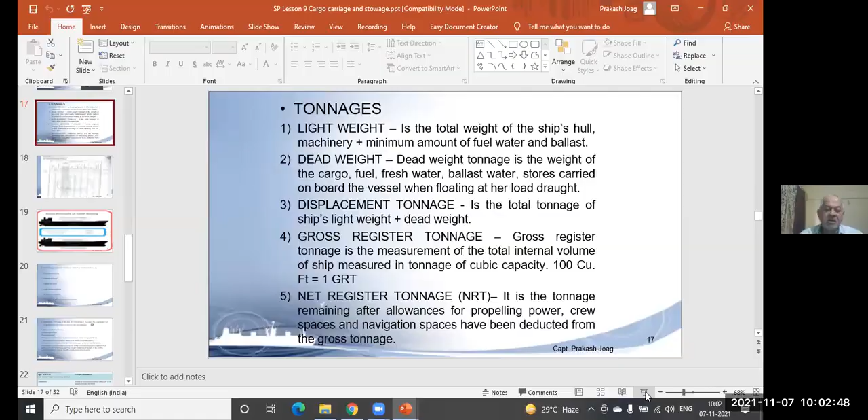So last time where we have left, let us do a little recap on that and we will proceed. Last time we had seen tonnages, and I explained tonnage with a simple example of a scooter or a car taken from a showroom.

When a scooter is in the showroom and you weigh it on a weighing scale, whatever weight you get is the lightweight, and it is called lightweight for a ship also. Whenever a ship is built and ready for delivery...

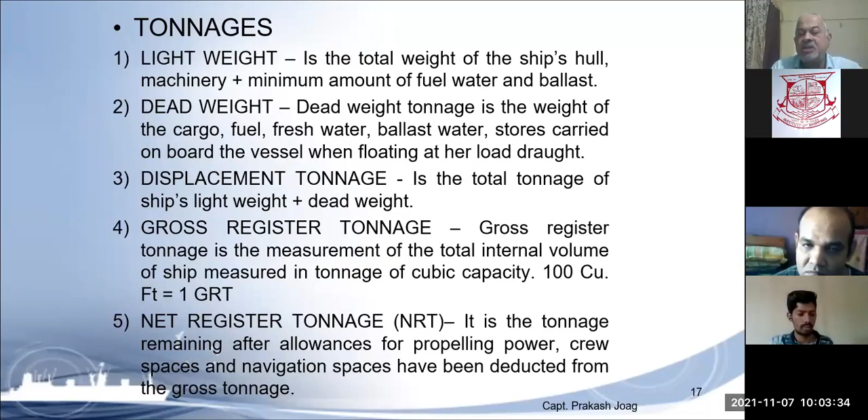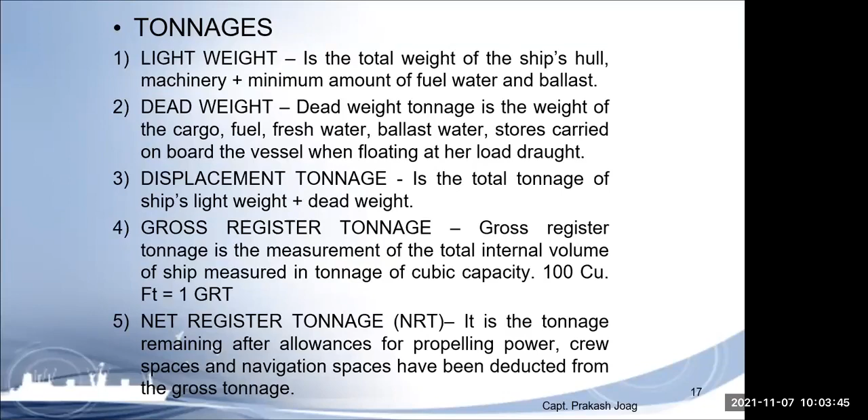The total weights are calculated as per how much material is used for making or building this ship, and that is the lightweight of the ship, with a little amount of fuel and a little amount of ballast, just sufficient for running the engine and keeping the ship afloat. So that is the lightweight of the ship.

This lightweight is a weight measurement, and the unit is tons. 1 ton is 1000 kg, 1000 kg is 1 ton.

Then we come to dead weight. The main component of dead weight tonnage is cargo. Then you will have fuel, fresh water, ballast water, stores, all those things added to the running ship, which are accounted in dead weight. But dead weight will not be having lightweight with it.

No lightweight, only added weights. Like we have seen in case of scooter - empty scooter weight is your lightweight. You sit on top, you have a pillion rider, you keep something in dicky, you keep your helmet hanging - all those things will be called dead weight. And you make a tank full, your petrol tank is full, then you add your lubricant, or you attach side mirrors or some extra things on the scooter - all those things will be your dead weight.

And for the ship, it is no extra shosha thing. So on ship, it is cargo, fuel, fresh water, ballast water, and stores that are carried on board. That weight which is added on the ship is called dead weight. And the main component of dead weight is cargo.

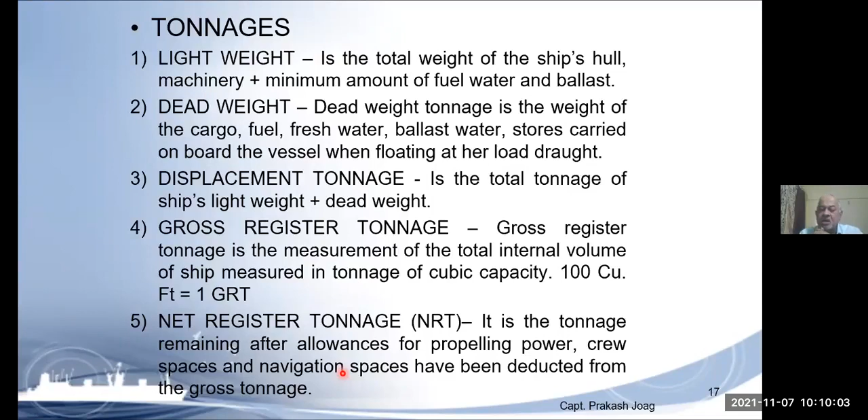Okay, so now why we are worried about this measurements, why we should know. As I mentioned, draft you were already knowing from our last lecture. Then I mentioned TPC, tons per centimeter. So how many tons for each ship, there will be a tons per centimeter.

So how many tons you have to add to have the ship sinking or coming up from the water by 1 centimeter? It may be 30 tons, it may be 60 tons, depending on the size of the ship, how big or how small it is. So when your draft is increasing as you add weight, you can easily calculate the total weight of the ship by draft. And this is given on a deadweight scale.

This is given by the builder. I have just scanned this and put it for you. This ship's name is SCI Pawan, Cochin Shipyard Limited, yard number so and so, and this is the deadweight scale. So on this side, if you see, this is the draft.

So draft of the ship, here draft you can read, and here you can see the deadweight, in salt water. How much deadweight will be there? This ship is very small. Here it is, I can read about 2000 tons deadweight.

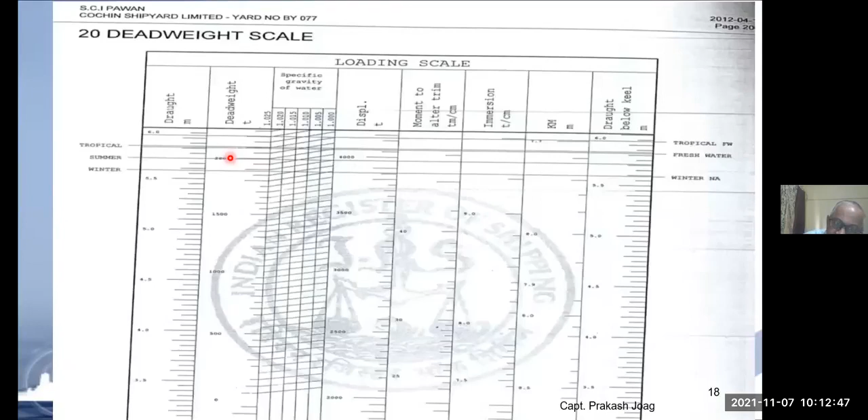So can you calculate the light weight of the ship? Displacement, suppose we take as 4,000, and deadweight is 2,000. What is the light weight of the ship? So 2,000 is your light weight of the ship.

And deadweight is having cargo, ballast, plus stores, and bunkers. So all those things come into your deadweight.

Now suppose you know the draft of the ship. If you can read the draft, you can easily calculate how much cargo is loaded or how much cargo is discharged. And for bulk carriers, the cargo is calculated by draft, because bulk carriers you cannot measure cargo when it is loaded in bulk, and you cannot weigh it as you load. You are not going to load 100 kg, 100 kg, 100 kg, not like that. It is continuously loaded in bulk, and then by a draft survey, the exact amount of cargo is calculated.

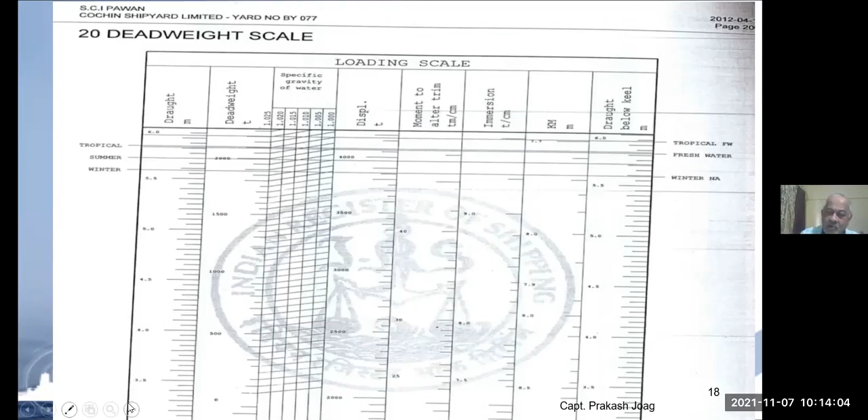Okay, so this is just an example given in your study material. First, when you come into port and take draft, you know the displacement. Then after loading cargo, you know the displacement again, so you can calculate the change in displacement, if you have not added any fresh water, bunkers, or lube oil.

Suppose within a short time you have loaded cargo, and while loading cargo you have to deballast, meaning take out the salt water kept for stability purposes. So the only change that has taken place is you have deballasted. Here they are saying change in displacement is 30,000, and change in ballast means you have taken out 5,500 from the ship. So total cargo loaded is this much, 35,500. Okay, so like that you can do these examples.

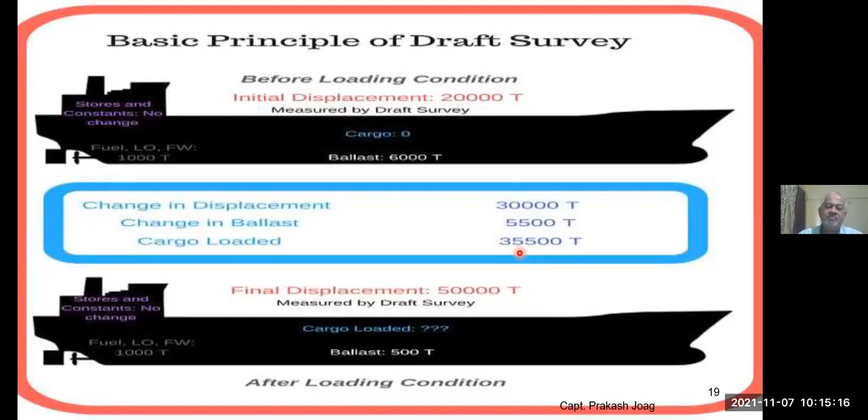Okay, so let us see further. When you are doing these cargo calculations, whether by draft or by taking sounding or ullage, there are so many people who should be there for calculation of cargo, how much cargo is loaded on the ship.

So one person is the charterer's surveyor. Whoever is chartering the ship, the charterer will appoint one surveyor. Surveyor means a person who is expert on this, so he will be doing these calculations. Number two, owner's surveyor, owner meaning ship owner. Charterer is who is taking the ship on rent, he is the charterer. Owner is the owner of the ship. I have told you, in our current shipping environment, whenever the word owner is used in shipping, it refers to the ship owner. So owner's surveyor, then appointed agent.

So suppose somebody has appointed, meaning owner or charterer has appointed an agent, then his person may be there. Then chief officer or master, sometimes master if chief officer is not there on ship. Otherwise chief officer, because chief officer is in charge of all the cargo operations on board the ship. And a chief officer, before becoming captain or master, he was chief officer, so he is expert on all these topics.

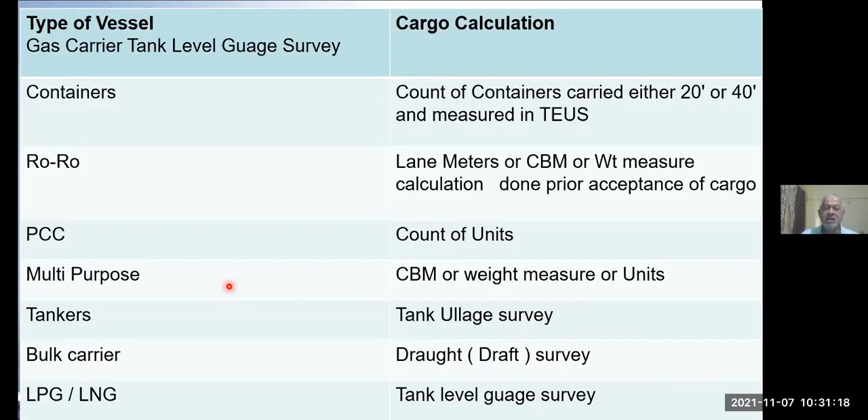Can you please explain the ullage survey section once again? Take a water bottle with a capacity of one liter, and suppose the bottle is half full - we say the bottle is half empty, correct? So for half empty, you measure from above down to the liquid surface height. That is called the height ullage of the tank.

Suppose the bottle height is one foot, and the half-full bottle has an empty space of half a foot above. Then you know the bottle is half full. Even if I don't show you the bottle, and I say half a foot is the empty space on top, you know the bottle has half a liter of water.

So the same way it is calculated, of course in tens of thousands of tons - maybe 10,000, 20,000, 5,000, 50,000 - because tanks are huge.

What is the difference between PCC and Ro-Ro vessels? Are these the same vessels? No - PCC is pure car carrier, meaning it doesn't take any cargo other than cars. But a Ro-Ro vessel can take any cargo, including automobiles - any cargo it can take, including cars.

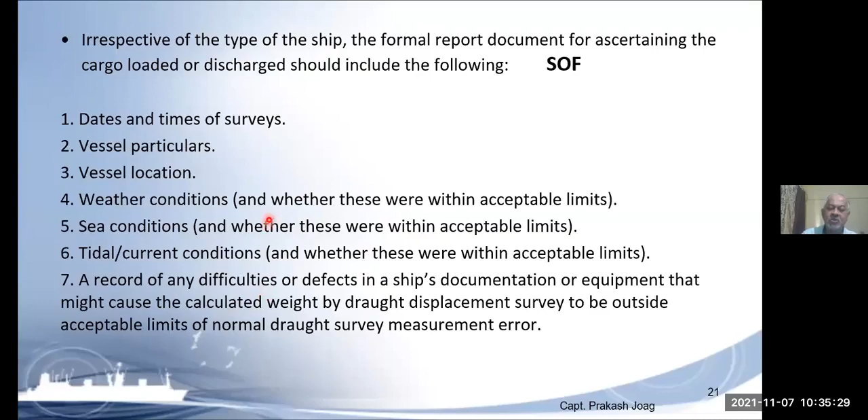So all these things are required to be recorded along with the time sheet. And this will be done by whom? We have seen this in the previous slide, about who all people will be there for these surveys.

Charterer's surveyor, owner's surveyor, appointed agent surveyor, chief officer, then shipper or consignee's representative or terminal representative - so many people will be involved. All people will calculate separately their own findings, and they will have to come to a common understanding, and they will declare the cargo figure, how much cargo is loaded on the ship.

Now let us see further - as we are doing the stowage of cargo on ship, the word stowage means keeping cargo on board the ship.

Different types of cargo require different things. Like liquid cargo requires a tank, and it has to be an airtight tank so that cargo does not evaporate and vapors do not come out. For car carriers, depending on whatever length of car is there - 1.5 meter, 2 meter car - those many slots will have to be there so that cars can be loaded easily. Such facilities are provided on ship.

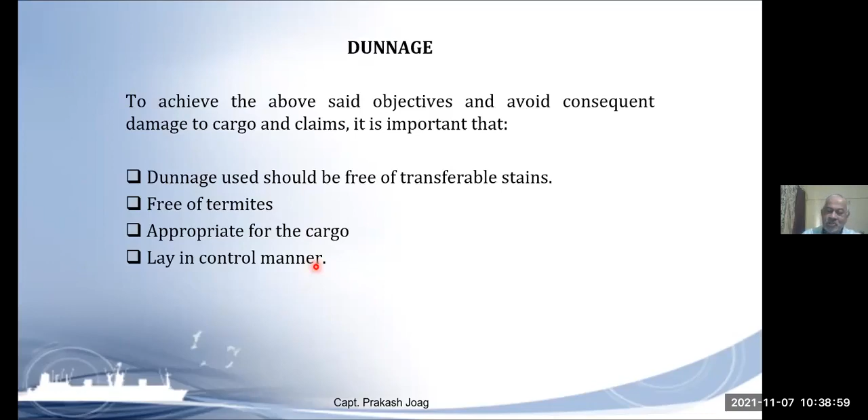Like if you have to use talcum powder for rubber sheets, the same talcum powder cannot be used for steel plates - steel plates require something else. So it should be appropriate for the cargo, and used in a controlled manner - whichever way it has to be used, it has to be used correctly.

So let us see what dunnage is. Dunnage is material generally used in the stow of general heavy lift, reefer packages and bulk cargoes, which is as follows. So to load or stow the cargo, whatever material is used - different types of material - is called dunnage. The word used is dunnage, and it comes in various sizes and various forms.

This is flat wood planks - flat wooden strips. Then this is spar wood - spar wood is vertical like bamboo. If you take bamboo, it is called spar wood. You can also have solid wood in a vertical structure, which is also called spar wood.

Then plywood - I need not explain, everybody knows what plywood is. Then craft paper, so paper also can be used as dunnage. Then HDPE, high density polyethylene sheets - plastic-like material - that can also be used. Then bamboo mats - specially woven bamboo mats are also used for different types of cargo.

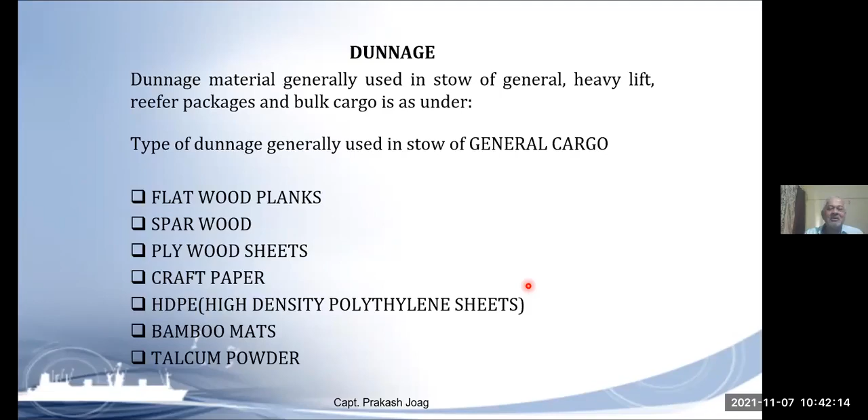Can you please explain spar wood? Bamboo, you have seen bamboo? So bamboo is called as spar wood. If this bamboo is solid wooden, length like a stick, that is called spar wood - vertical, cylindrical but long. That is called spar. That word is spar.

Heavy lift packages means heavy cargo which is still loaded on heavy lift vessels. So you have to use spar wood or heavy sleeper wood. This word is very common.

Of course nowadays you may not see this, but many of you must have seen rail lines. Railway lines - nowadays they are using cement sleeper wood down below, but earlier days, maybe about 30 years back, all the railway lines were put under heavy wood. Heavy wooden planks used to be there down below, and these railway lines were fixed onto that. But now, as wood is an expensive commodity, you cannot find so much huge wood now, so you are using cement.

So whatever is used under the rail track wood, that is called sleeper wood. So whenever you are loading heavy cargo, you have to use sleeper wood. So this is the word, heavy sleeper wood.

For reefer cargo, flat wooden planks, split bamboo strips, and bottom gratings are used, basically because it is non-conductive of heat. So to maintain temperature, like you must have seen ice transportation for sugarcane juice sellers or cold drink houses - they take slabs of ice, and that ice is transported with sawdust put around it, or gunny cloth is wrapped around the ice, just to maintain the temperature and not lose it so fast.

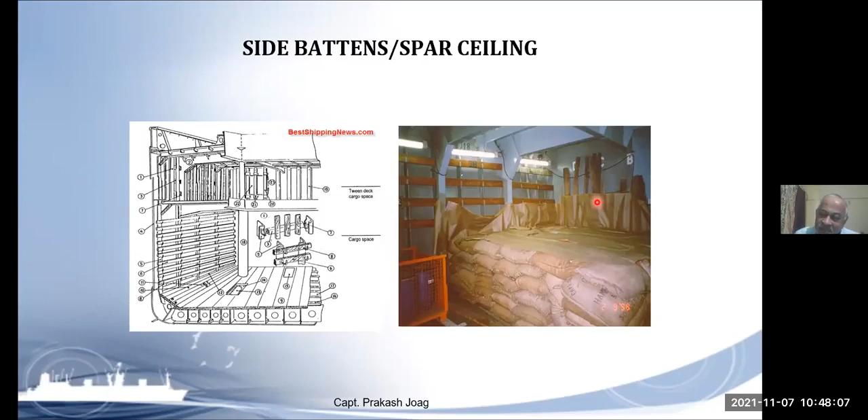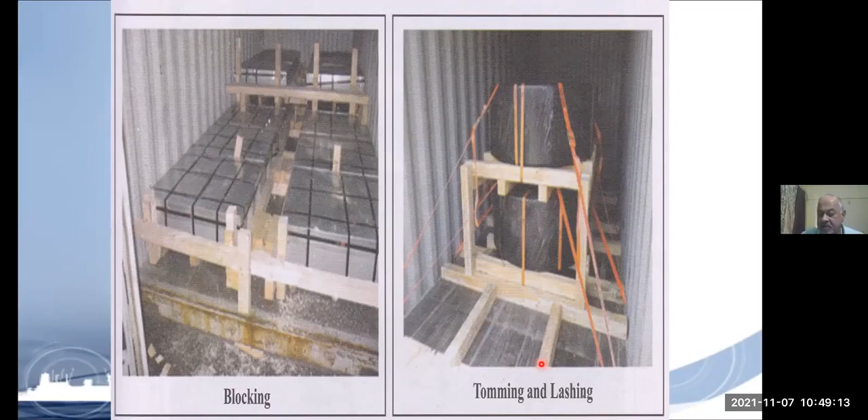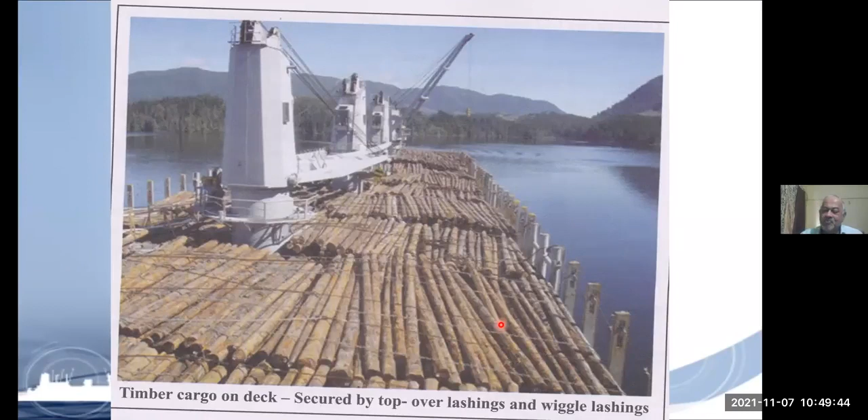Are you able to see this complete picture? No, you are not seeing my control panel. Sir, able to see, sir, can see. Okay, because on my computer I can see the control strip on top of this Zoom.

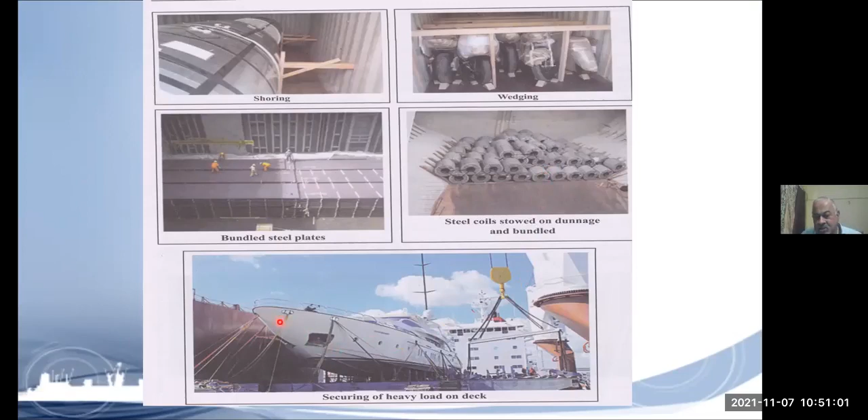Now this boat, a luxury yacht, is loaded on deck, and see how much lashing is taken here. So this is securing of the cargo. This boat itself is a cargo on the ship.

So boats are transported mainly from China or Taiwan to the US or to Europe, because people there use these boats and they are cheaply manufactured in Taiwan, Korea or China. As I mentioned, holidays are given together, 4 days, take the fifth day also as holiday, no problem, and enjoy. So most people in Europe go sailing on these boats. It's a family time pass for them.

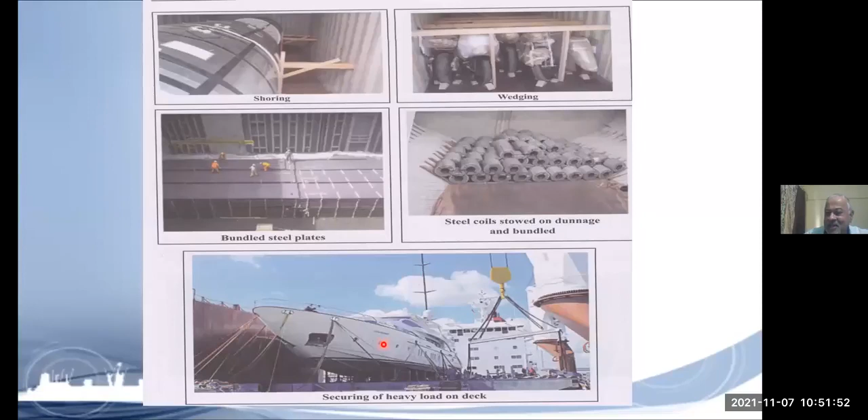This is a very, very risky and very tough life to go for sailing.

Whenever you are loading coil, you can fix them by putting these wedges. If you've seen, suppose you are taking a car on a slope and the engine stops, the car slowly starts falling behind. You can put this type of wedge under the tire so quickly the car will not go behind. The tires will get stuck on this.

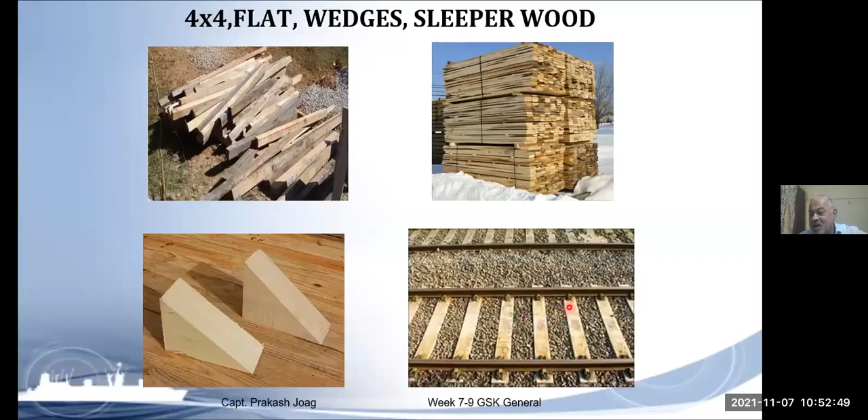Then this is the sleeper wood under the railway lines. That's all. So this was our last topic to discuss.

Of the previous topics which were balanced loading of the cargo, stowage of the cargo, how to count the cargo, payment of the cargo, draft, load line - as we're taking questions one after the other, I will not wait for any question answers here, and we will quickly move to next topic.

Next topic is going to be, which one will we take? Yes, cargo handling equipment. As we are doing stowage, this topic we will take. This is lesson number 10, cargo handling equipment. Let us see this cargo handling equipment.

We have seen earlier I showed you a movie of general cargo loading, and at that time I explained how different types of cargo are loaded, as well as how different types of cargo are loaded by different types of equipment. So more such equipment we are going to see or learn here.

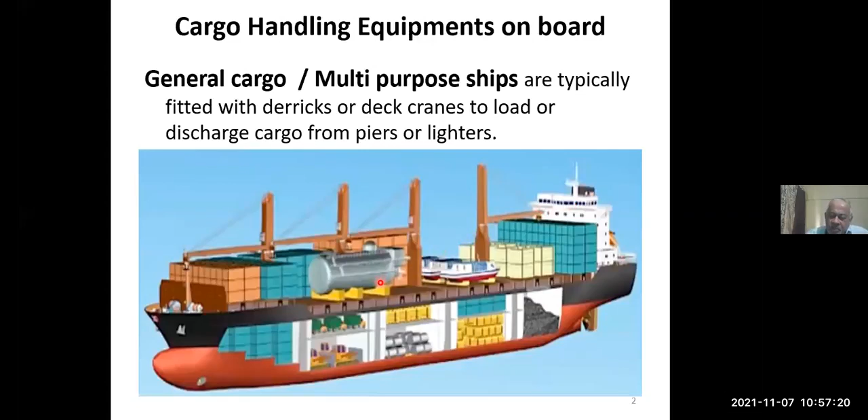This type of equipment is called cranes. This ship is also fitted with cranes - this is number 1 crane. And this is what is called a derrick.

This is the word DERRICK. So a derrick is basically a boom, an iron boom, and this iron boom has so many wire connections by which you can take this iron boom from port to starboard, meaning left hand side of the ship to right hand side of the ship. You can also pick up the cargo depending on the boom's capacity, which is called SWL, safe working load of the derrick.

Derrick is an old, primitive method of loading cargo, or primitive equipment fitted on the ship for loading and discharging cargo. Now the most modern thing is cranes. Cranes are very modern, very fast, can work quickly, and require less maintenance. So there are many advantages to cranes.

In the figure you can see this derrick and this crane. How would you describe this crane? Just as a simple thing, layman's terms. This derrick has so many wires, so many parts coming down, whereas this crane is neat, tidy, and very compact. Capacity-wise, both may have more or less the same capacity, but this is neat and tidy, requiring only 2 people to operate, while this derrick requires many people because there are a lot of complicated machineries and components. That is called a derrick.

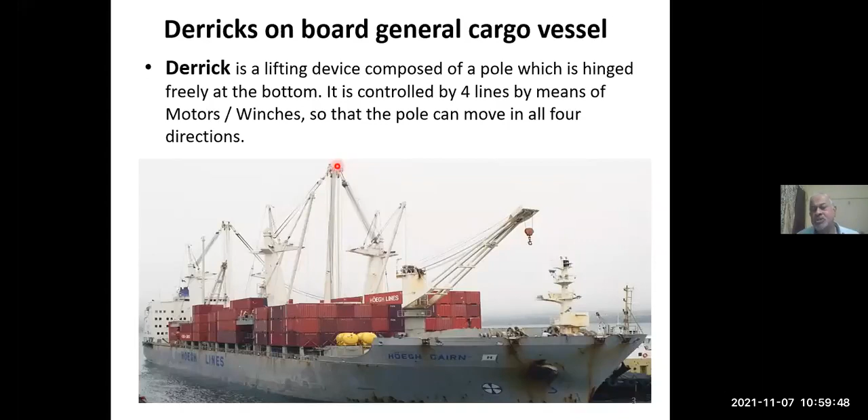Nowadays derricks are not so much in use, but most ships will be fitted with cranes. So this is how derricks and cranes look.

This is a mast on the ship. Any vertical structure on the ship is called a mast. This is the boom, the metal boom, which is hollow. And this is a block or sheave. From this sheave, wire is reeved, and this is a hook by which you can lift or lower the cargo.

And this is the winch, the machinery to take cargo up or down. You can swing this boom to port or starboard side, and you can change the vertical angle also by using the topping wire. This is primitive equipment which used to be there, and it was very common till the 1980s, or you can say up to 1990.

Nowadays you only have this type of equipment, which is called a crane. But both parts are now different. This is also a crane body. This is a pedestal down below. You don't require such a mast and so many types of wires.

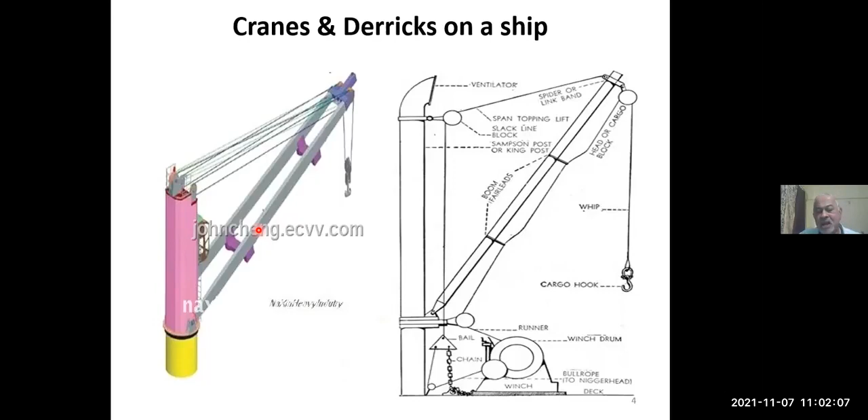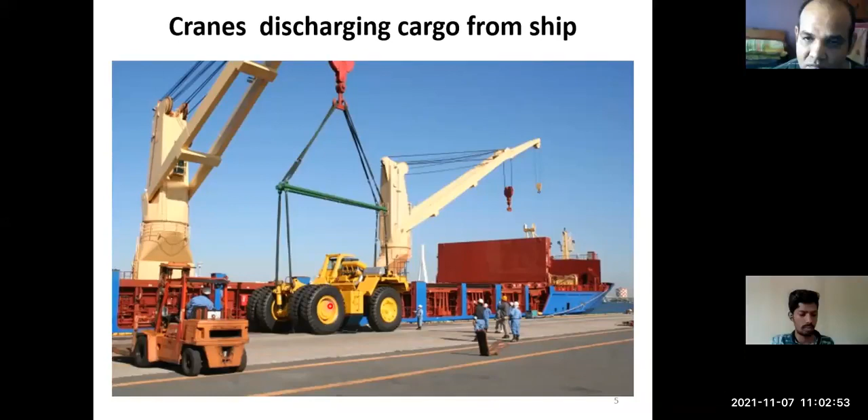A new vehicle is discharged. This is also crane. These are ship's fitted cranes. This yellowish buff structure is the ship's crane, and this is the operator's cabin here. This cargo is discharged on the jetty. So that is how it looks.

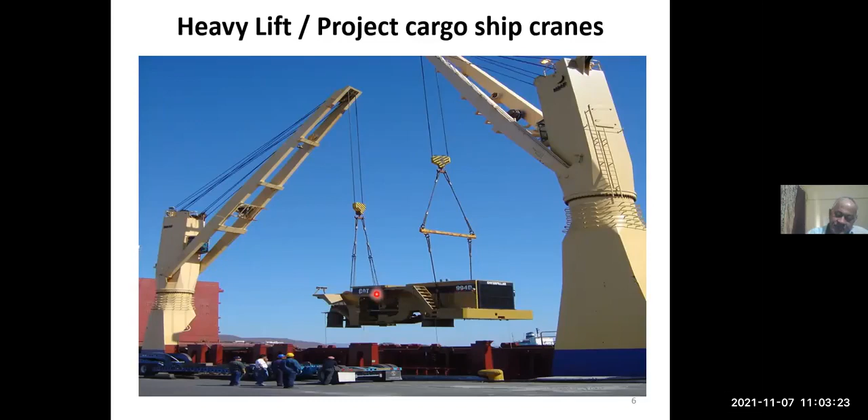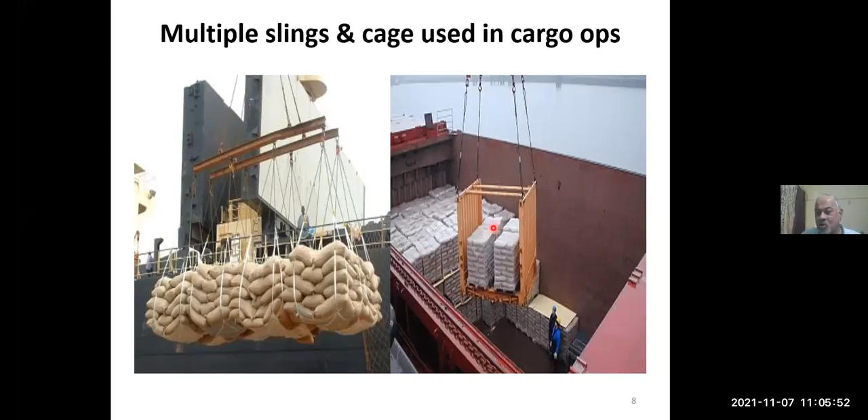So a big volume of cargo is going quickly. This is the ship's cargo hold, and this cargo is going in for loading. This is also a cargo hold. This is a general cargo ship, and I can make out this is a tween deck. The lower hold is already full. These bags are bulk cargo, but bagged bulk cargo, which is why it comes as general cargo on the ship since it's not in bulk form - it's packed cargo.

These bags are normally of 1 ton capacity. This is a mobile forklift-cum-crane, so it can lift this and keep stowing them 1, 2, 3. They are loading about 3 high of these 1 ton bags. So down below, how much pressure will there be? With 3 bags, that's 3 tons of pressure on the base surface of the cargo hold - you'll have 3 tons of weight there.

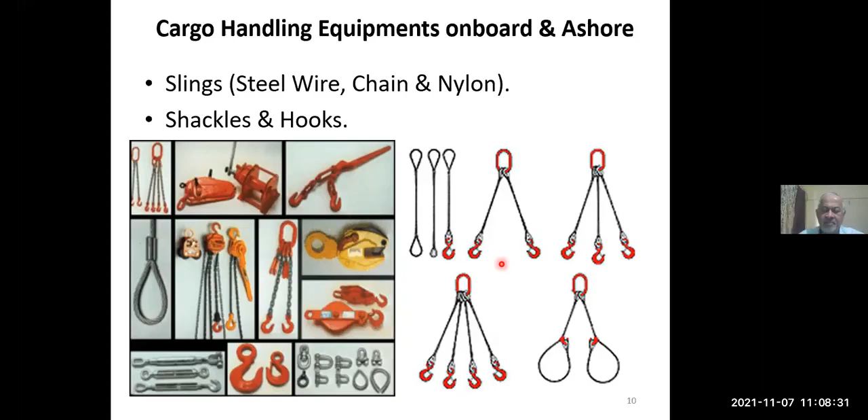And these are bottle screws or turnbuckles, and these are wire snotters. These are chain blocks and different types of material - slings and hooks - used for lifting and shifting the cargo, meaning loading and discharging. Different types of cargo will have different equipment used for lifting and shifting, though some of these are common.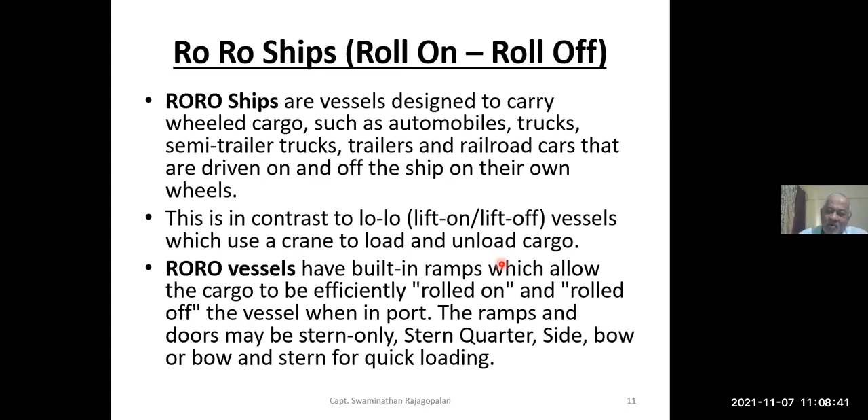Ro-ro, roll-on roll-off ship - I have already explained wheeled cargo and how cargo comes in, so I will not spend time on that here now.

And this is called a ramp - ramp walk, as we say. This word comes from here, ramp. The ramp opens on the ship, mostly at the stern, but sometimes it can be on the bow, meaning the front part of the ship. Yes, that is also possible, or it can be on the sides.

Sir, hello. Yes, yes, please. Sir, in those ships, are containers also loaded on top of the ship?

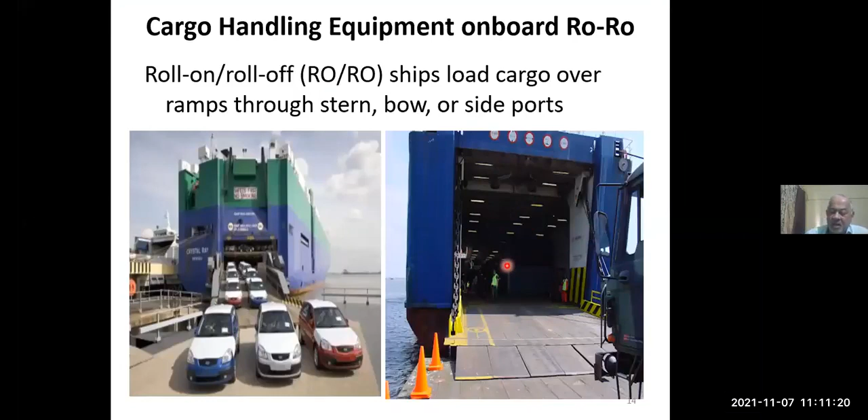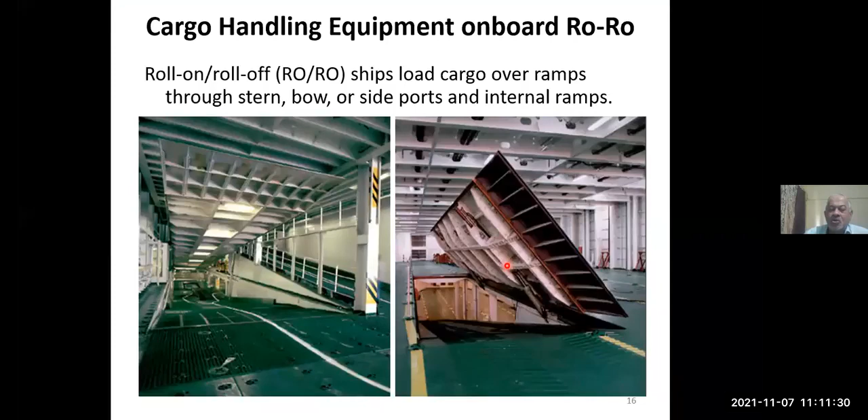These are also some pictures of roll-on roll-off cargo handling equipment. Okay, let us see further.

On tankers, you can load cargo by shore pump. So shore will be giving this cargo to you - shore will pump this cargo into the tanker, and the tanker will receive this cargo in the tanks.

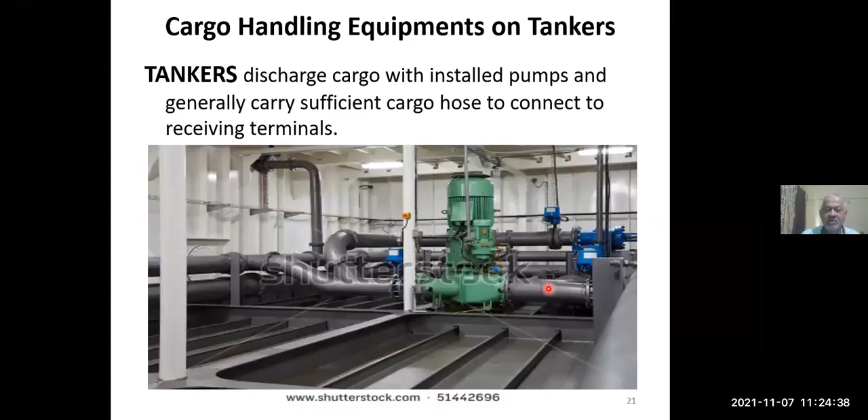This is now single buoy mooring. As the capacities of tankers are large, a huge amount of this source of energy is required by all countries, including India. India is the third largest consumer of crude oil. If you have to bring huge amounts of oil through tankers, you require deep draft ports. In India, we do not have that. A VLCC with a draft of 30 meters cannot come into any Indian port. There is no 30 meter draft port.

Where? Mundra is there, sir, I think. Mundra is not taking tankers that size. No, not 30 meters. There is no port in India which can take 30 meter ships. Adani Mundra, their draft is 14 meters. I'm talking about 30 meters, not 14.

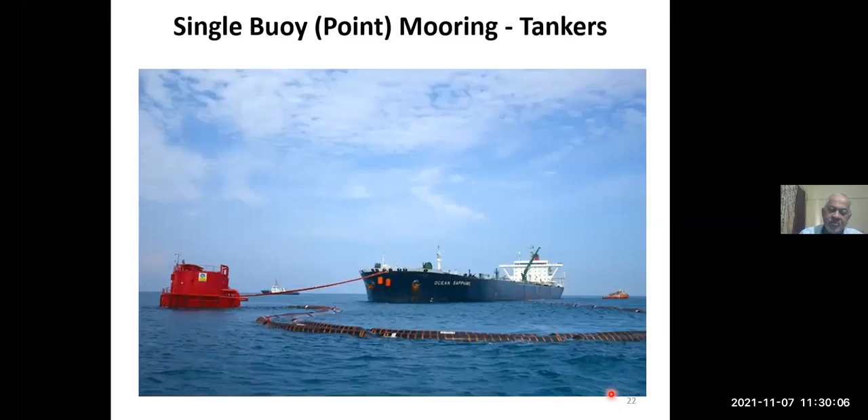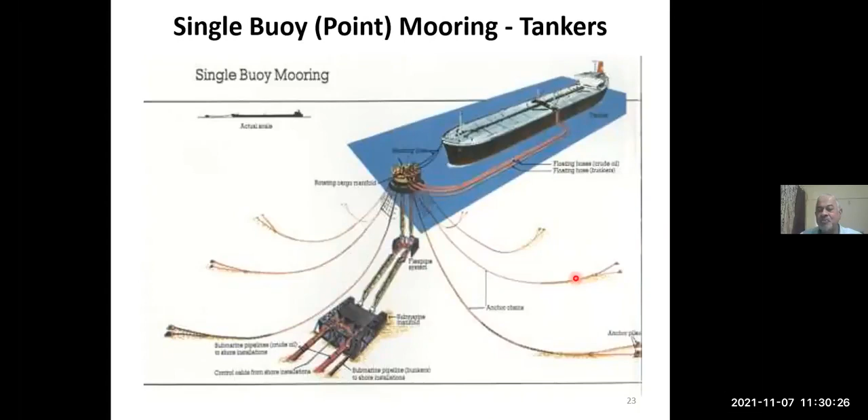So this is the SBM moorings, just to make you familiar. Sometimes notes can come for 5 marks on this. So this is a little schematic view from the tanker pipelines and SPM, and from SPM to shore and shore to this thing, showing how this SPM is moored or anchored down below.

For LNG and LPG carriers, a similar pipeline system is there. Shore pumps the liquefied natural gas or liquefied petroleum gas to the ship, and through ship's pumps they pump it out again, liquefied. It is also liquid bulk cargo. LPG and LNG ships come under liquid bulk cargo, like tankers, product tankers, which are also liquid bulk. Pure bulk carriers are called solid bulk carriers, carrying solid bulk cargo.

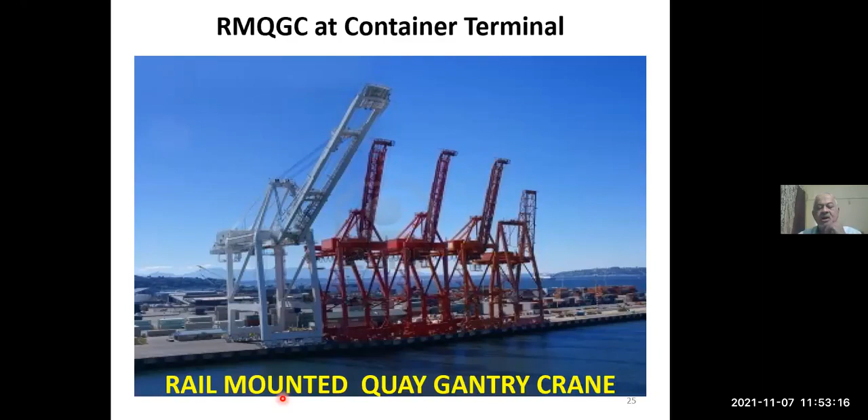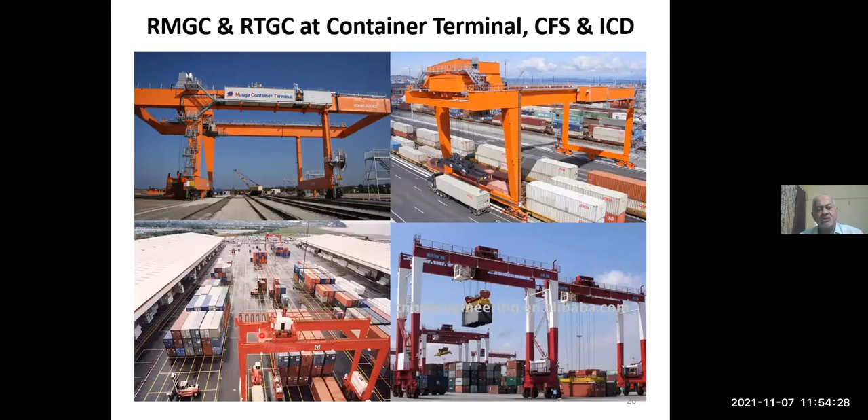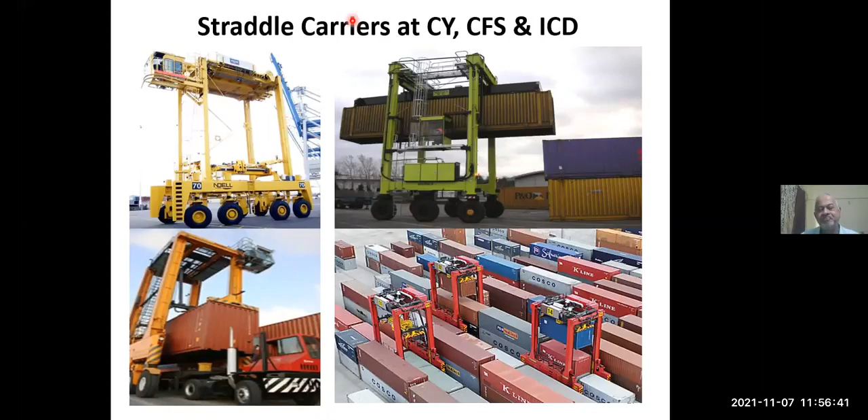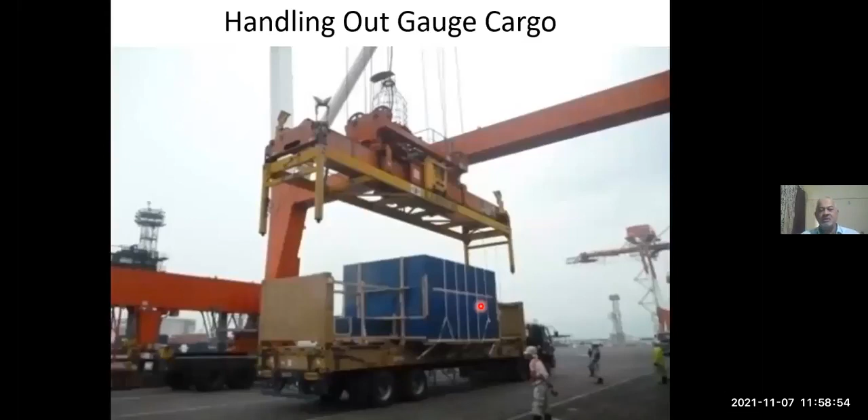See, this is a container. These are the sides of the container, and the side length height will be 8.5 feet. Now this cargo height is more, so it is over-dimension cargo. So this spreader cannot fit on this. They have made a specialized tool so that these container twist locks can fit here, and the high, out-of-gauge cargo can be lifted because the spreader cannot sit on this to fit. So you have extended legs for the spreader. This is called a spreader, spreader of the gantry crane.

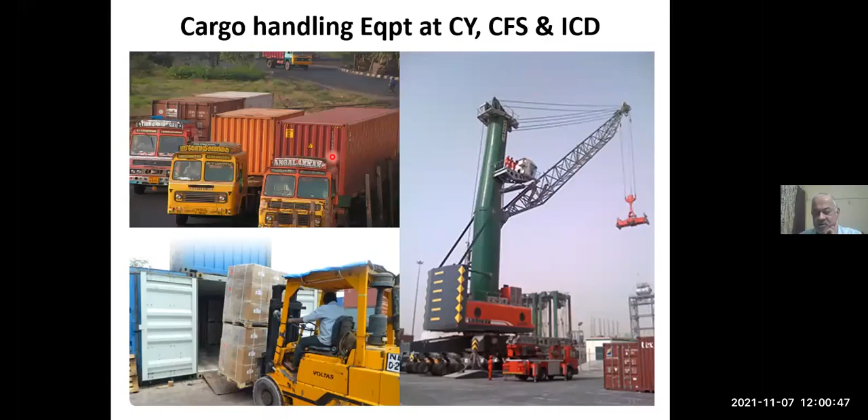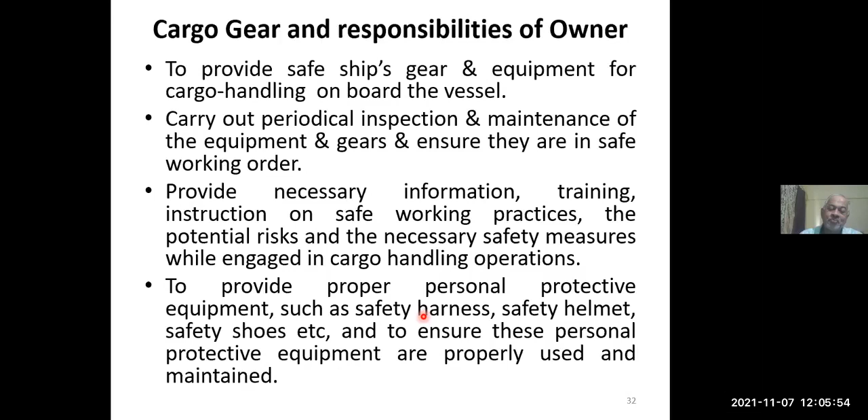Provide proper personal protective equipment such as safety harness. Ship owner must provide, not to shore labor, but to the ship's crew, personal protective equipment. When ship's crew are working on cargo gear, they have to be provided PPE.

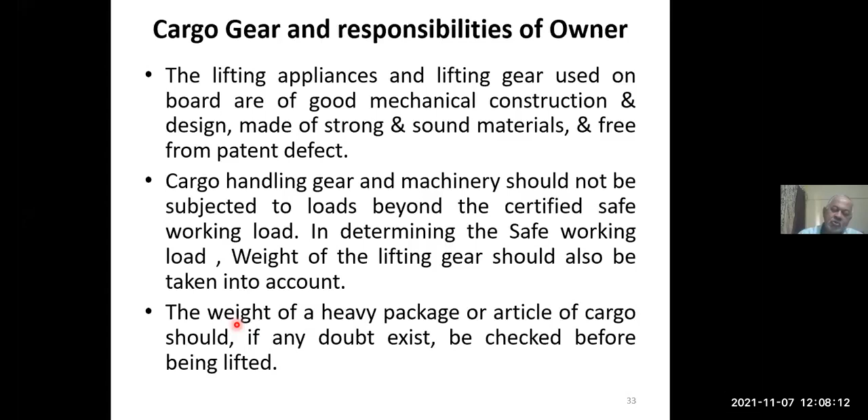It has to be stenciled or marked on the side of the cargo gear.

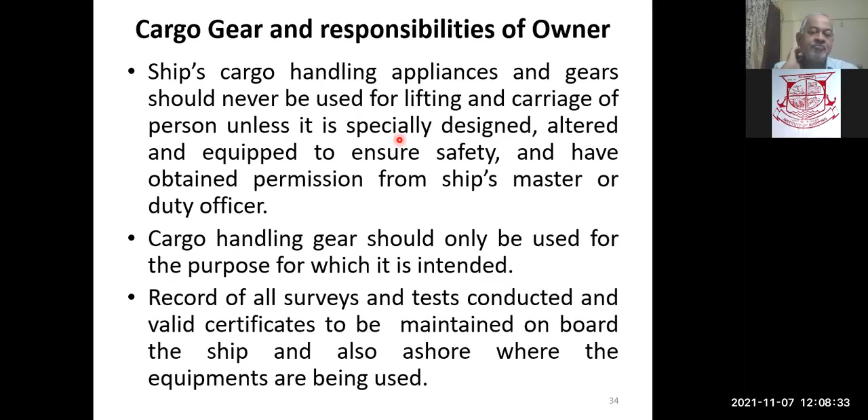Ship's cargo handling appliances and cargo gear should never be used for lifting or carriage of persons unless specially designed, altered, or equipped to ensure safety, and permission has been obtained from the ship's master or duty officer. These gears should not be used for any purpose they are not built for; you must use them only for their built purpose.

Cargo handling gear should only be used for the purpose for which it is intended. These first two points are stressing the same point.

Records of all surveys, tests conducted, and valid certificates must be maintained on board the ship and also ashore wherever cargo gear is used. So cargo gear requires testing, and a government authorized competent officer will come on the ship, test the equipment, and give the certificate, which is valid for 5 years.

This is called the test certificate. During these 5 years, every year you carry out maintenance, and every year it has to be inspected by a competent authority. So again, a government authorized person should come and inspect the gear so that it does not fail at any time and does not meet with any accident.

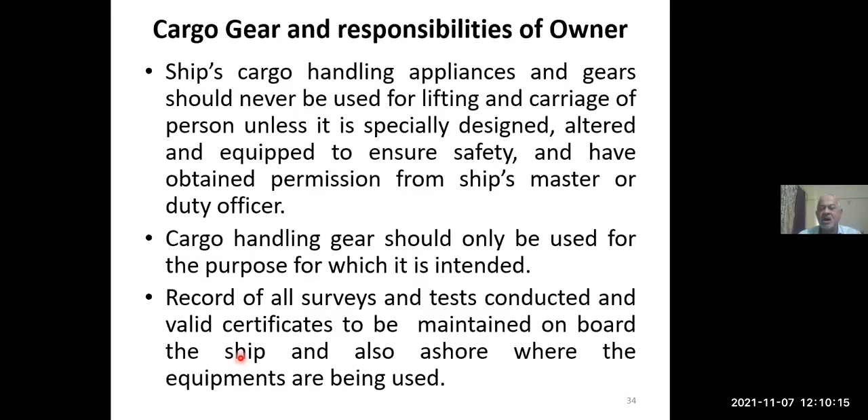So this is about cargo gears, for container ships, general cargo ships, all these gears come under the same category. This is not there in your book, but I thought it is better that you are aware of this. Now we are moving to bulk cargo.

This is called the angle of repose. When you are loading bulk cargo, it is dumped in the cargo hold. Dumping means from the top you are pouring it, but it is not liquid, it is solid. So when you are pouring, suppose rice or wheat or grain, and you keep pouring from the top, this sort of heap will form. You are understanding, yes?

This heap formation will be different for different types of bulk goods, depending on the property of those goods. When this heap is formed, the angle it makes with horizontal is called the angle of repose.

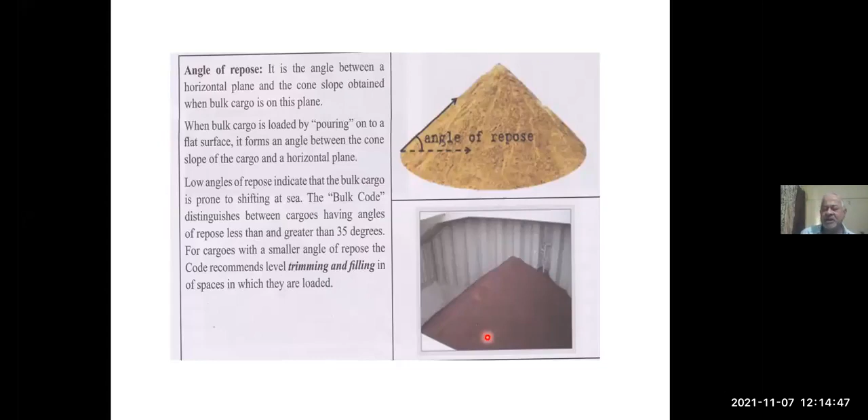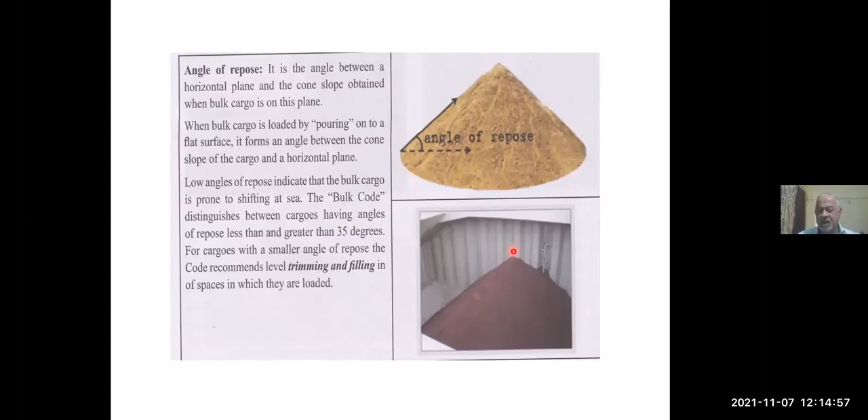So if angle of repose is less than 35 degrees, you have to level the cargo - it becomes dangerous to carry in heaps. But if it is more than 35 degrees, it is considered safe for carrying the cargo. This also comes under stowage of the cargo, as we are discussing now for bulk carriers.

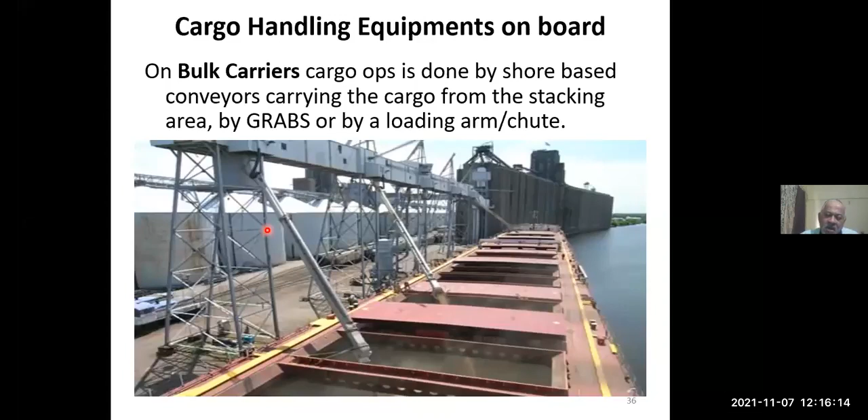Grain cargo is your rice, maize, wheat, sugar - those are your bulk cargos. While discharging this bulk cargo, you are sucking this cargo, and for loading you are using a conveyor belt, which will dump cargo on the ship and it will go on loading. To calculate how much cargo is loaded, you take a draft survey - forward draft, midship draft, aft draft - and by taking mean draft, you can calculate the amount of cargo which has come in.

This is bulk timber cargo, and this is a special equipment to collect this bulk timber, this wood. Earlier you were asking what is spar - this wood is spar wood, this is called as spar. Lamba lamba dande hai, so those are called spar wood.

Now this is a grab, normally grabs are available on bulk carriers. This is cargo loaded as a heap, and this is the angle of repose. Even if the ship rolls more than 30 degrees, this cargo will not shift because the cargo's angle of repose is more than 35 degrees.

And these are grabs, these are automatically operated. See, this is a grab. These are in two pieces - number one piece, number two piece. You put it inside in open condition and then close it. So this is a closed grab.

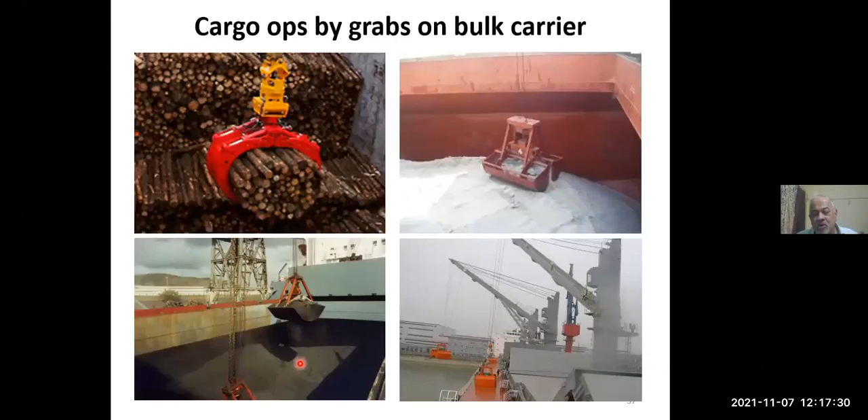This is cargo inside. You take it out and open this. So this piece will open this side, and the other piece will open this side, and cargo will fall down. So how will cargo fall down? Let us see further.

Okay, we will come back here. Upper we will see. This is the grab and it is discharging grain. Now the grab is closed and a lot of cargo is spilling out, overflowing. Once it overflows, you take it out and put it inside the hopper.

See, on top here, you discharge the cargo. From here, this is called the hopper. From here it goes onto this train, and from the train you take it down. This is like a funnel, small funnel shape, so you empty out your grab here.

This will get filled up with cargo, and this will be like a funneling effect. It will come down into this trailer. So this is how the cargo is discharged. This is what is called a conveyor belt, which is used for bulk carriers.

Now what is this conveyor belt? Suppose I ask, have you seen a conveyor belt? Most of you will say no. But if I remind you, you have seen a conveyor belt, then you will say yes, yes, that is also a conveyor belt.

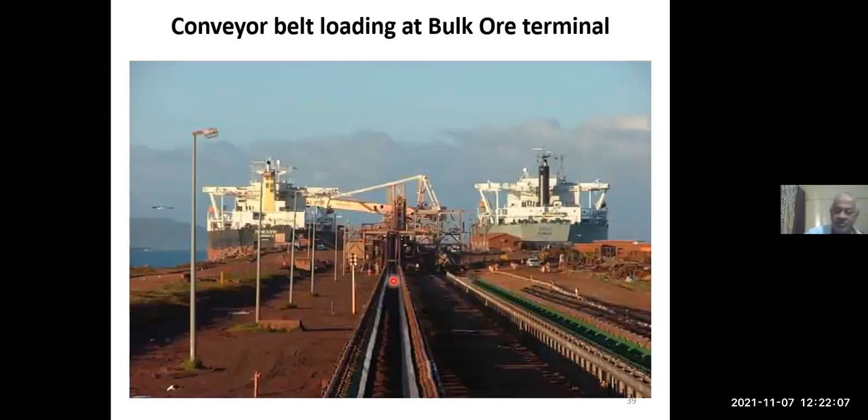So this is also, see here, conveyor belt coming. It has come here, it has come here. Now this conveyor belt is ending here. It has come here and is going down and going back from the bottom like this - going underneath. This conveyor belt has gone back.

Now what happened to the cargo which has come on the top conveyor belt? Yeah, this has come, this has come, this has come. And here the conveyor belt is ending, so the cargo has fallen off onto the other conveyor belt. The other conveyor belt is only this much, small. See?

And again it will go back on the conveyor belt, bring cargo, go back. So when it is coming up to here, cargo is falling into the cargo hold where you want to load the cargo, by conveyor belt.

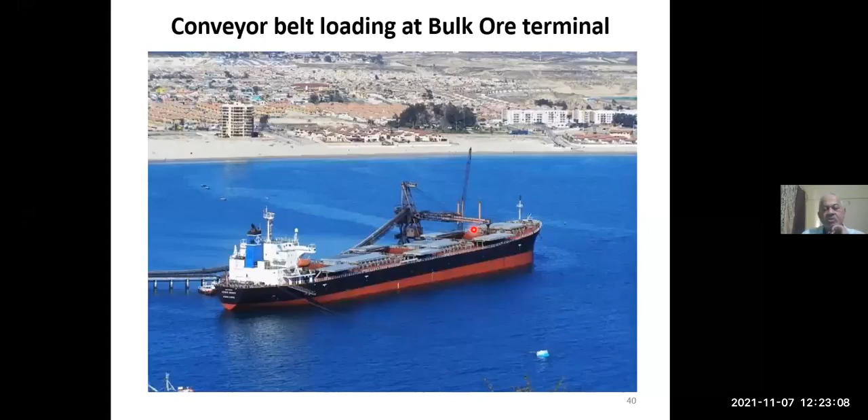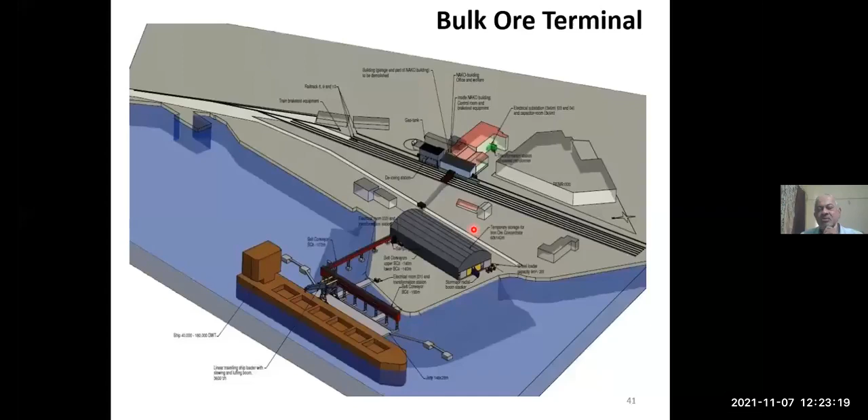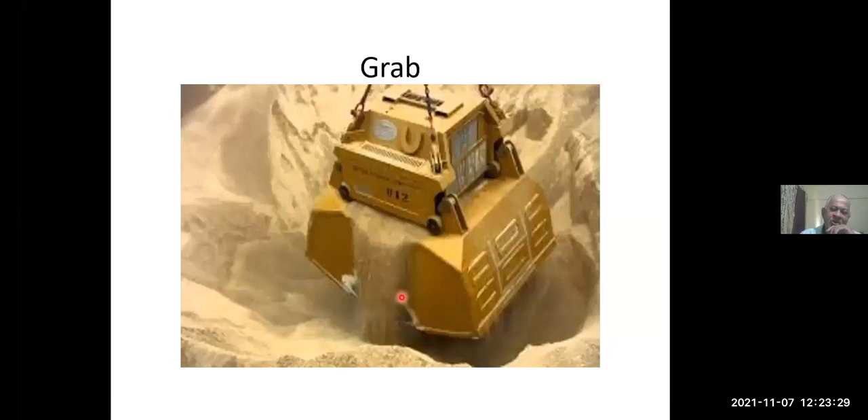This is also a port terminal, showing how bulk carriers are loaded by conveyor belt, cargo handling container equipment. This is the grab, which is used for discharging or sometimes loading bulk cargo.

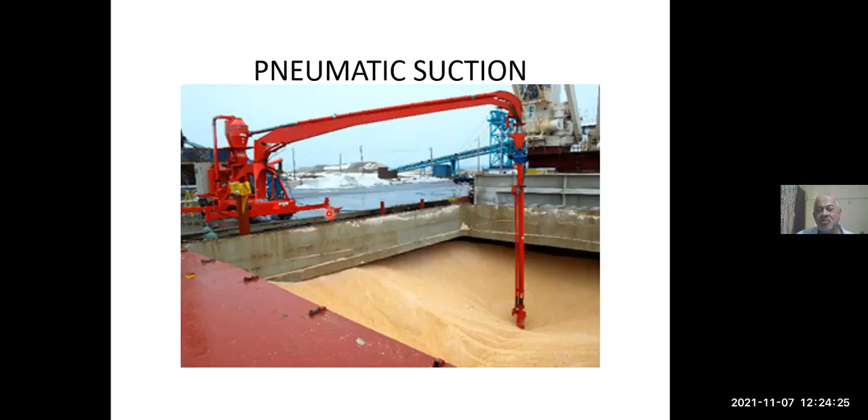It can be put on trucks, it can be put on trailers, wherever you want you can put it. This is a pneumatic suction for discharging of the cargo, pneumatic suction. This is hopper.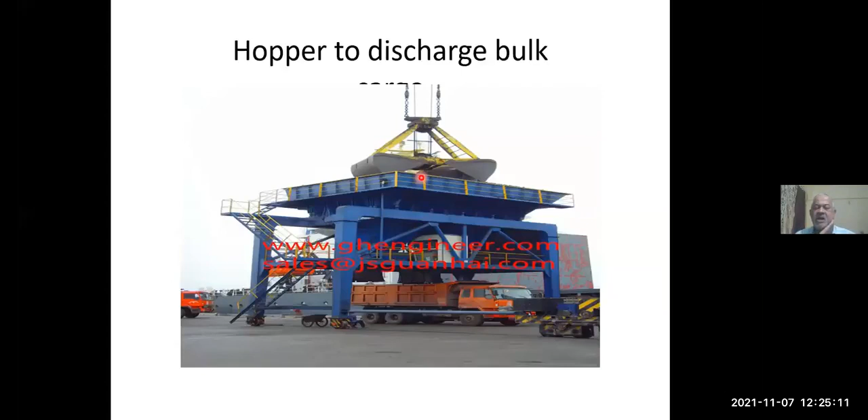G-R-A-B. This is cargo hold cleaning. The ship's crew is cleaning the cargo hold.

So on a bulk carrier, if you are loading cargo, suppose coal is discharged, how will the cargo hold be after coal is discharged? This is a question to you. Dirty, black, it will be dirty and black, correct? And next cargo happens to be suppose wheat. Can you load wheat in the coal cargo hold? No, sir. No, so that means you have to clean it thoroughly.

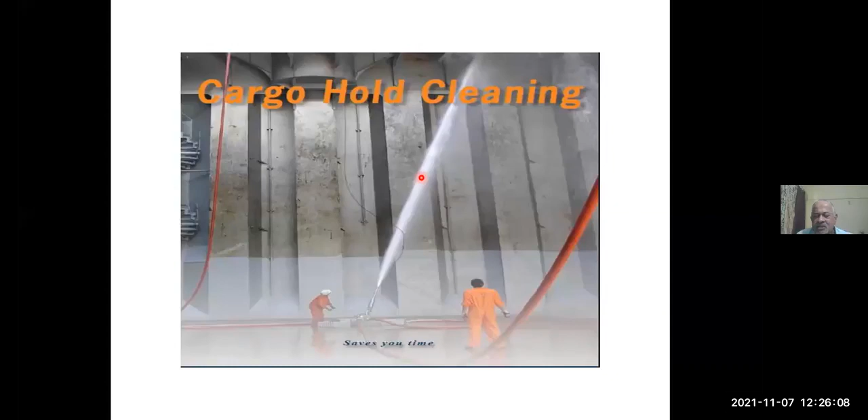You have to maybe wash it 5 times with soap water, soft soap, hot water, like that. You have to clean it to the bare material and you have to load the grain later on only if the hold is passed successfully by the inspector.

So the ship's crew will have to clean the cargo holds, and they are cleaning it with high pressure water jets on the sides of the cargo hold, to make it suitable for another grade of cargo. But suppose if your previous cargo was coal and the next cargo is again coal, you don't require any cleaning as such.

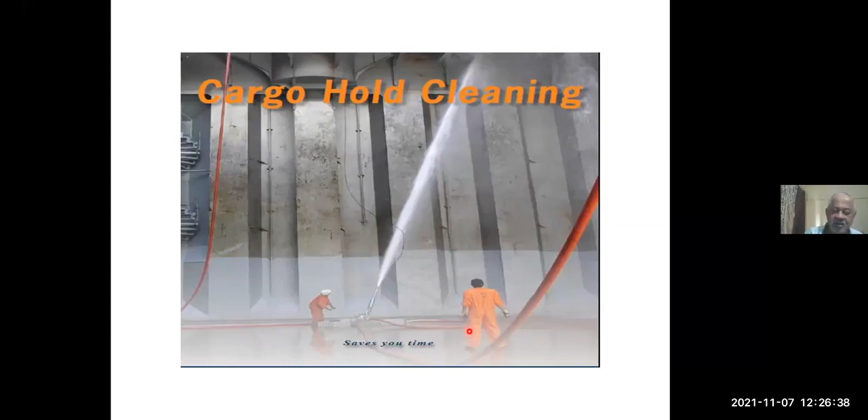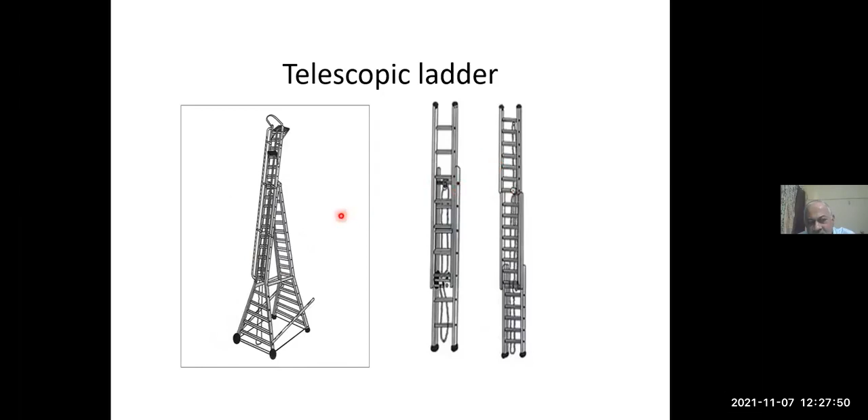It is having wheels down below, so you can move it here and there, but it is not extendable like this one. You can reach up to only this point.

Now there is one agency called the International Cargo Handling Coordination Association. International is easy to understand, and handling coordination means cargo handling. They have given so much importance to cargo, various types of cargo, and whoever is handling, loading, transporting, packing, stuffing these cargos, they have made their group and formed their association.

So one party, suppose tomorrow you are loading one car, okay, by sling, not by driving in, because if you are not having a car carrier or ro-ro ship, you will not have this ramp available.

But suppose you have decided that this cargo has to be loaded by crane, then you may be lifting this car to put it on the ship, and while lifting, the car can get damaged. Okay, so all these people, they have made...

Association means group together. So you share your experiences, you share your difficulties, and you share your learning objectives, learning knowledge, or whatever accidents or damages have taken place, you share with each other. And that can be done through International Cargo Handling Coordination Association. So association is activity done by the people with common interest.

Okay, I think that's the end of this second topic, which we had to discuss about the equipment on board ship and on jetty, which are used for loading, discharging, or handling of the cargo which is exported or imported. Okay, with this note, we will go to another topic of today's, which is going to be...

Intermediaries in shipping. Intermediaries and representatives in shipping. And this is going to be lesson number 11. Okay, so before going to that, any questions so far?

No, sir. Sir, I have a doubt. No questions. Yes, please. Yes.

So this, as we've been discussing about the different types of cargo equipment and all, these bulk carriers have cranes on board. They use the grabs for the discharging and all. So basically, is it compulsory to carry the grabs on board as per the vessel requirement or for the charter requirement, or does it depend upon the cargo they load?

Okay, I will answer your question. See, it all depends how much the owner wants to spend. That is number one, okay. How much...

Please unmute it. Okay.

How much the owner wants to spend, how competitive or how good a ship he wants to operate on the market, how quickly he wants to get the charters, all depends. So if he is providing grabs on ship, he is increasing the maintenance of the grabs, the stowage of the grabs, he is increasing its safety, he is increasing work on board the ship. So everything. So if he is able to encash it by hiring his ship at higher charter rates, then it is very good. But if he is not getting any benefit of that, then why should he carry all that?